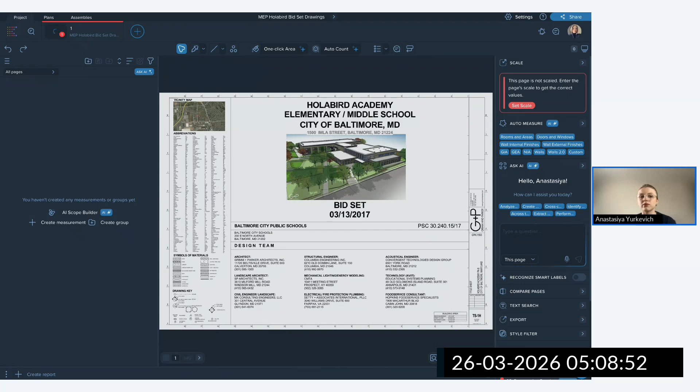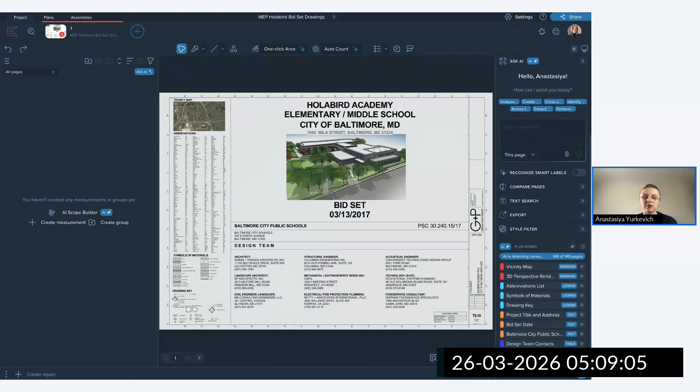So what I see here, just a moment, you can see it detecting those zones. Again, pretty big file, but what it's already doing is processing the pages, and you can see it detects the zones. I'll open a different file so you can see what we have here.

This red zone is labeled as drawing, which is correct, and this will help some other tools understand. For example, text search, and I'll show that text search should count only on the drawing. We don't usually need to count within tables or legends. So it helps text search understand where to count and what to count.

The same goes for some notes and tables. It will make it a little easier for other tools to search for information within tables and schedules, because they have already been detected. So this is how it works.

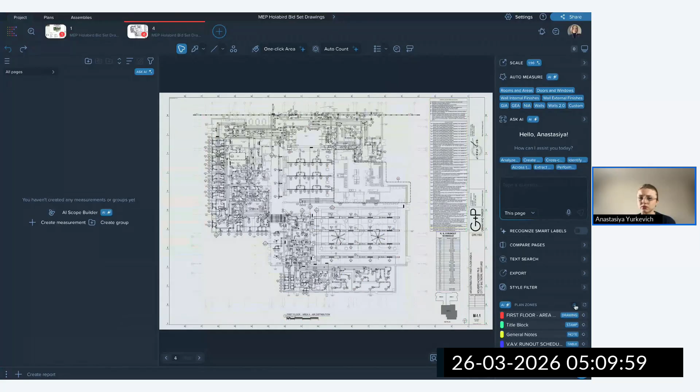Here's the little eye icon. If you don't want to see those zones, you can hide them for a second. If you click one more time, you'll see them back again.

What you can do, first of all, if you open the file manager, you'll be able to rename your pages quickly. We have rename with AI still available — you can ask the AI to rename the pages and then adjust the results. So it's still quite flexible.

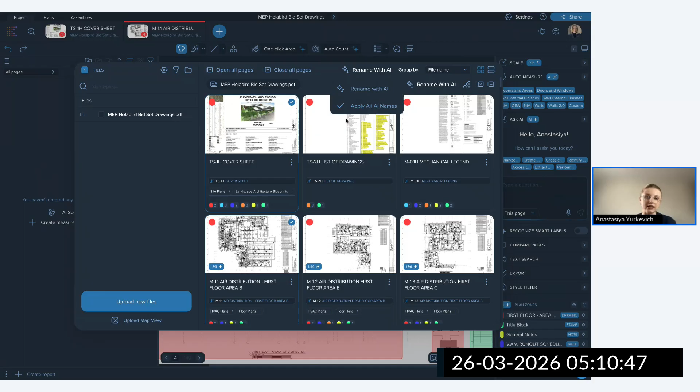But here there's also apply all AI names. What that means is the AI went through all the pages, picked up the names of the pages, and now, in a second, they're all named based on the title of the page. So you can either use rename with AI if you want them a little more custom, or if you just want the page name, use apply all AI names. This is something the feature does automatically.

One more thing — we get this question quite a lot. If you have tables, what's the easiest way to import them into a spreadsheet? Because it's sometimes not possible to select them like PDF text, and rarely does that make much sense.

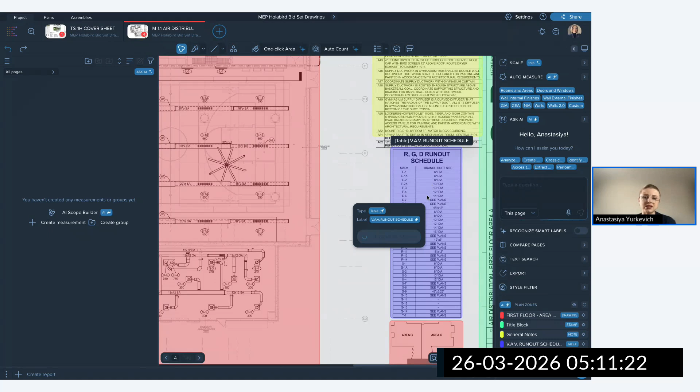Here, right now, if you click on anything like a table or legend, it's going to allow you to export it into sheets. So you just need to click. It's a quite simple and small table, so it's going to be quick. You can see it's generated — you'll see the same exact table, but within your spreadsheet.

Of course, with larger tables, it may take a minute, depending on the size of the table. But you can just click and keep doing something else. It's going to process your request, and eventually it'll add that tab into your sheet, so you can keep working.

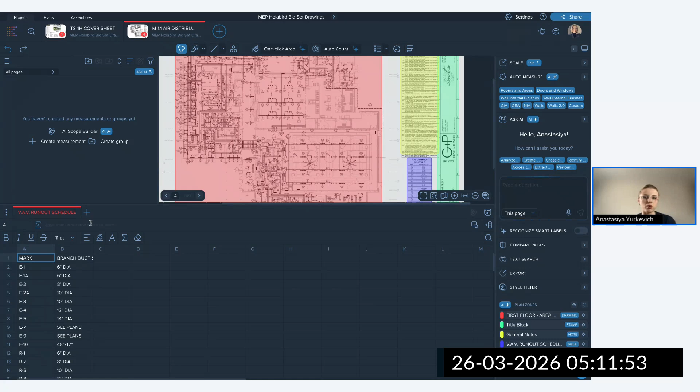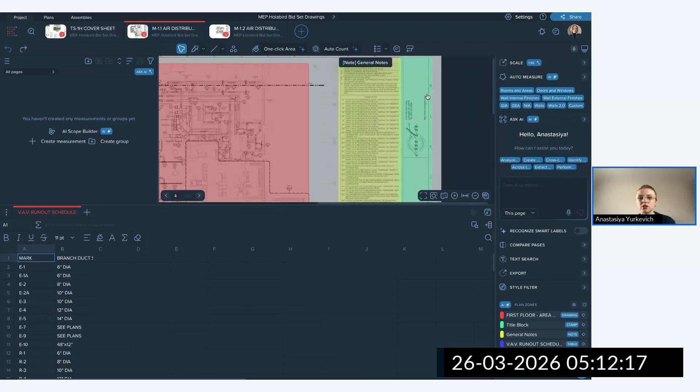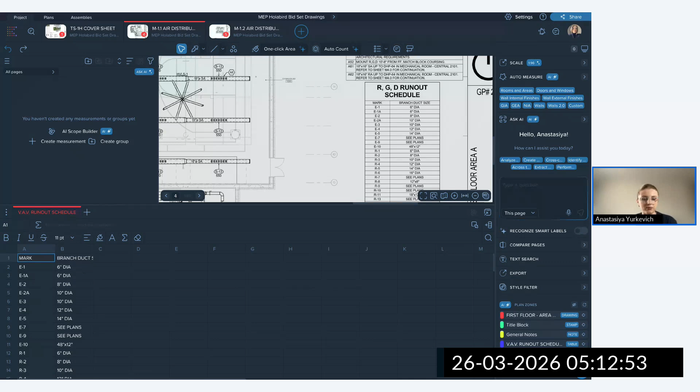You'll be able to move any table or legend into your spreadsheet really quickly by just clicking on it. If you hide it, it's not clickable, so you'll need to click and see it one more time. This is what zoning does - you don't have to do anything, the AI just does it for you automatically. If you'd like to move a table into your spreadsheet, or want your pages renamed, you can just click on it and that's done.

The next feature we have is Ask AI. It's not a new feature, it's an improved one. Ask AI has been with us for quite a while, and we've been improving it constantly. It started with just a single page search, then we allowed a multi-page AI search. Now it's something even a little more smart.

So how it works at the moment - first of all, something I really like, we changed the interface, and right now I can use my voice for any prompt. The prompts to any language model should be very clear, so if you just type in a word or two words, this isn't necessarily a prompt. If it's a long one, it's better to use your voice - just like you can talk to it, you can use any language, just say your prompt, and it's going to find the answer based on your prompt.

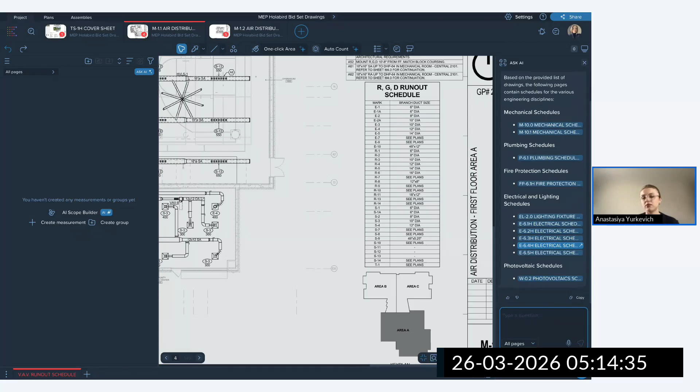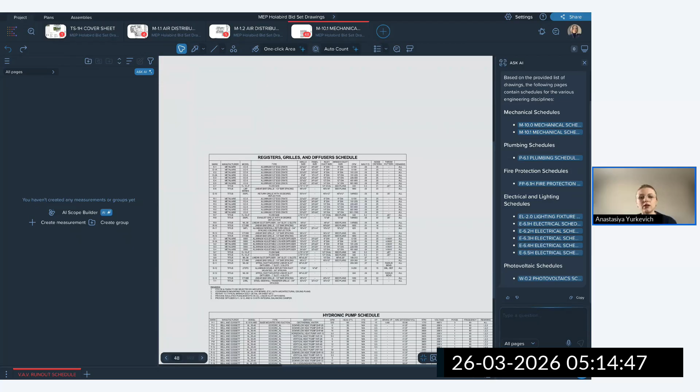So what it can do, for example - let's try, not this page, all pages. Don't forget to select all pages, and then I'll use the microphone. Give me a list of all schedules. And you'll see another great thing about this tool, something we didn't previously have - previously it would just answer with text saying, on page 5 you have a schedule of this, on page 10 you have a schedule of that. Now there are links - it's creating links to the page you need. You can click on it, and now we have a table, mechanical schedule, lighting schedule, and it's going to bring you to the page.

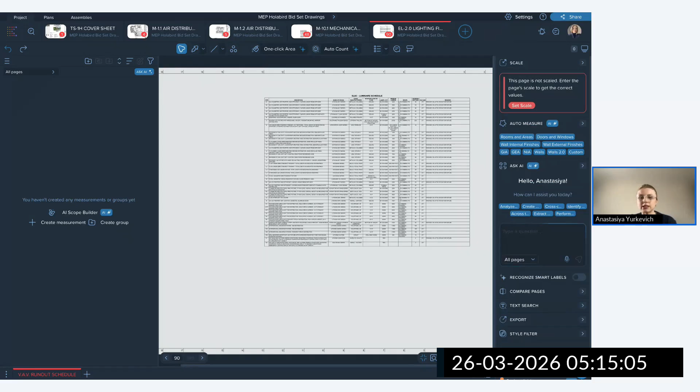Something you can now do - you can switch to this. For example, you want this schedule imported into your spreadsheet. What you can do now is go to zones, click export to sheets. I'll just need to reload the page, I guess, because it's still processing something I clicked on previously. Export to sheets - this will take a moment to be exported into sheets, but I can keep working, I can keep doing something else, and it's going to eventually just be imported into sheets.

So you can quickly find all the relevant information - where is the page with division 8, 10, or anything like that? The page with lighting schedule, the page with, I don't know, plan for - let's try, what pages have HVAC plans? My mistake, all pages. It's not going to find anything. Stop.

What pages have HVAC plans? And I guess it's going to still produce some links, so I can just click, and it's going to bring me to the HVAC plan, which is very useful if you have a lot of pages, and especially if you're working with something, not just all of them - floor plans, then it's going to floor plans, air distribution.

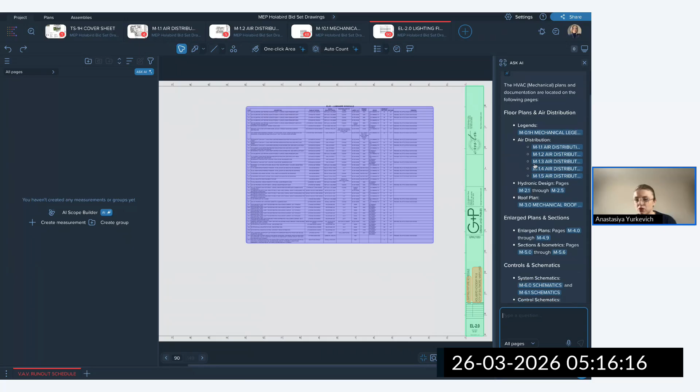So here, if I click on it - yes, HVAC plan, this is correct. So I would need to read through.

Again, my prompt is pretty simple - you can ask it in a little more detail, so with, I don't know, just a drawing, a schedule for something. It's going to respond back with some information.

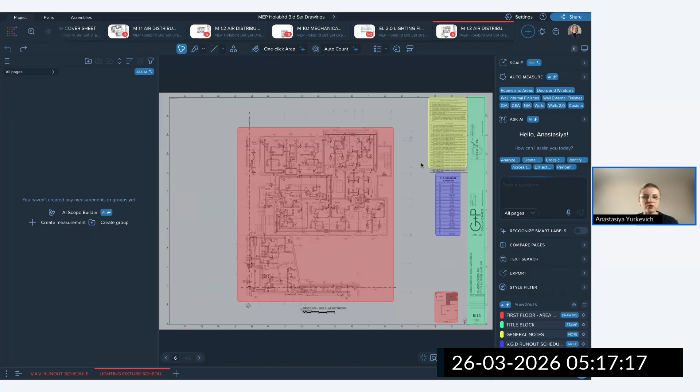And it's going to give you the links. What it's not going to do, it's not going to measure for you. It's not going to provide any deep analysis, find the discrepancies between the plan and the scope - no. It's great for you to quickly work with your PDF file, especially if it's a large one. You can just ask it and it's going to bring you to the page, find some answer, or you can ask it to create a table with something. Yes, but please be aware it's not like an estimator that would do the analysis for you - this is a chatbot. Let's move on to the next tool that we have.

So Ask AI - the next one is called AI Scope Builder. AI Scope Builder allows me to quickly build the breakdown for any new project.

I know a lot of you already have templates and it's easier to just reuse them, but we have a lot of clients with very custom projects, where maybe every time windows will be named and labeled differently, and every time there's going to be some new breakdown. So AI Scope Builder can help with that.

We have some chat built in there, so you can ask it to change something. I'll switch to a different plan that I have - I'll be using this one because it's not like MEP, it's more like a general contractor project. So what I can do here is use the AI Scope Builder.

You can create all the groups manually, it's not a problem. But if you want the breakdown created by AI, you can just run the AI Scope Builder. It's going to take a second, depending on the size of your plan. It works great if you have a spec schedule or other data sources to pull information from, but even if you don't - just a floor plan or a couple of elevations - it's still going to try to create something for you.

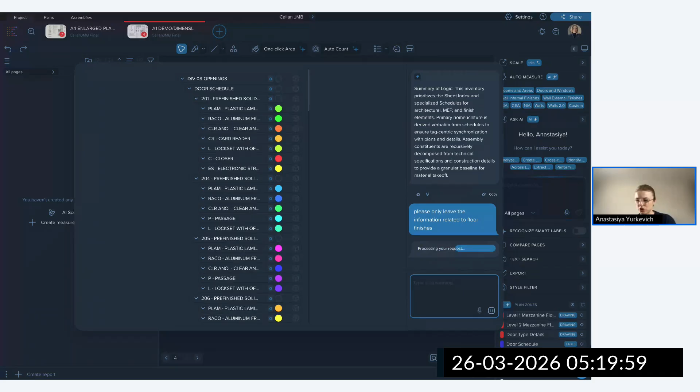Well, it did - you can see division 09 finishes, floor finishes, all the types of finishes, and then the floor preparation. And you can create that breakdown - just click create breakdown. It's created, and now you can start building measurements and adding them into the groups.

Of course, you can still delete groups, add groups, rename them - it's still very much flexible. We just try to save your time on creating dozens, and sometimes even hundreds, of groups for each and every project.

Let's move on to the next tool that we have - the AI Report Assistant. Another AI assistant that I really enjoy, because you can use your voice, and reports - especially for new users - may not be as clear as we'd want them to be. It takes time for a new user to understand where to click. Now you don't really have to understand anything, you can just type in your prompt and get the result.

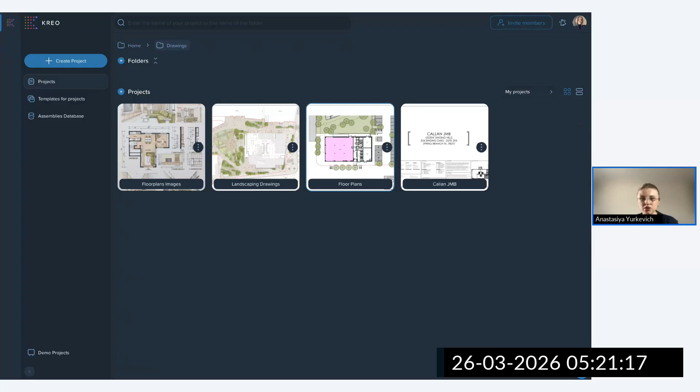I'll switch to my platform - I have a project with a couple of measurements already, so I don't have to waste time creating anything. Here I just have some measurements, show all - a couple of walls, a couple of areas. Now I can create my report. This assistant works with two types of reports: table with measurements data and table with items data. I'll select table with measurements data and click create.

I'll open it, and here we have a little button, Report AI Assistant. We have a couple of prompts here you can use, and again, you can type in your prompt, or I can just say something - let's try: group by all levels and only include area and perimeter columns.

Kreo, I hope it understands that it's 'group' - maybe I mispronounced it a little. Well, yeah, it understood it. You can see what it did - it grouped by level 1, level 2 grouping, basically the breakdown that I have here. I can see internal walls with the same breakdown, area and perimeter - so it only selected the area and perimeter columns.

If you want to add something else - add a column with vertical area - it's just going to add another one with vertical area, so you can adjust the results. I don't think we have any aggregate vertical area, because I don't see the totals. I'm not even sure that we have it - yeah, we have vertical area here.

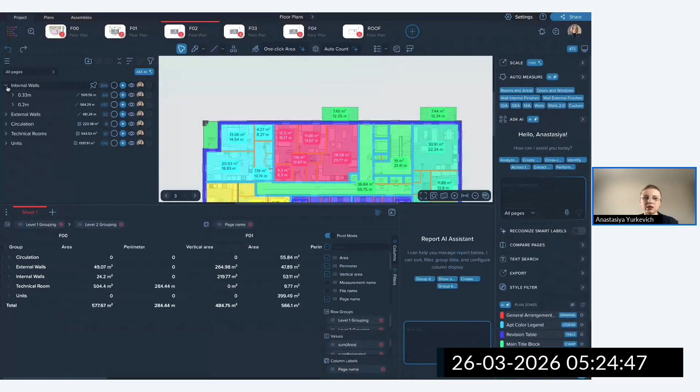Text search, again, we had this tool for a long time previously. It was a simple one, so you can click on any text and it would find all the same text elements on multiple pages. What it couldn't do previously, and again, it's something that this new zoning thing allowed us to do.

Previously, if I click on some element, let's say something S2, any element — I'm showing a different tool, I'm sorry, I got ahead of myself.

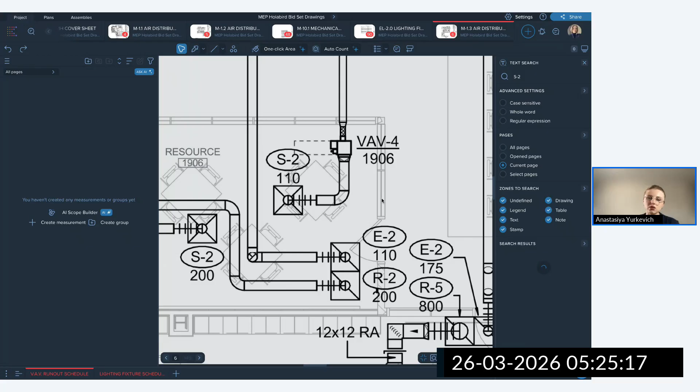Text search here: you can just select the text, click on it, type it in. What it's going to do is find all the same text elements on the current page it's working on. Previously, it would just automatically count everything, from the legend, from the schedule, from the grid, sometimes if there's a grid.

So it was still helpful, but you needed to go and delete some of the elements. Right now, it understands that this one is a drawing and here is a table. So it's not going to just do a joint count — it sees that there are 38 within the drawing and 1 in the table.

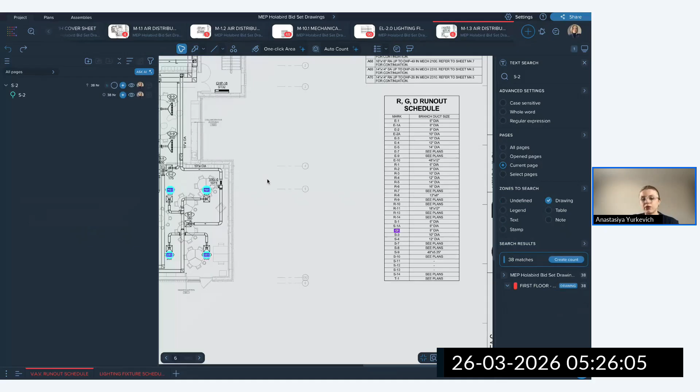And you can unselect — let's say you don't want to count anything from the table, you can just click on the drawing and create a count of 38. So this zoning feature allows us to make the text search much smarter.

And you can, of course, use text search if you just want to find some information. Let me just select another element. I can click on it and select everything, tables and legends and everything, and it allows me to see where it's located.

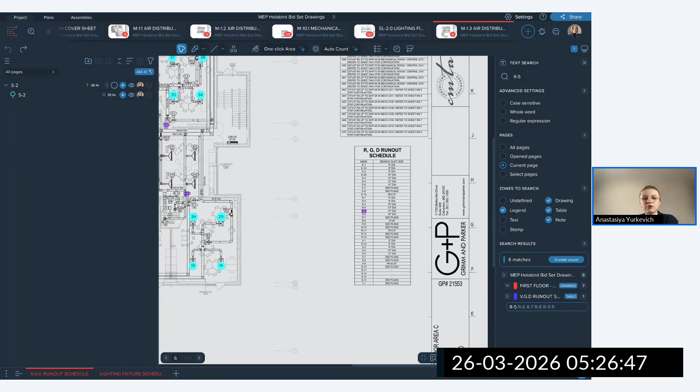Sometimes I can run it on multiple selected pages or just all pages. You can type in any word, for example for your specific trade, and then just click here and it's going to bring you to the page where this table or something is located.

So there are a couple of different ways you can implement this text search. Usually it's to count elements that are labeled with some text, and now it's much smarter. Clients who have been with us for a while know that previously you'd need to go to the legend and delete that 1-2 counts from there. Right now, that should be solved.

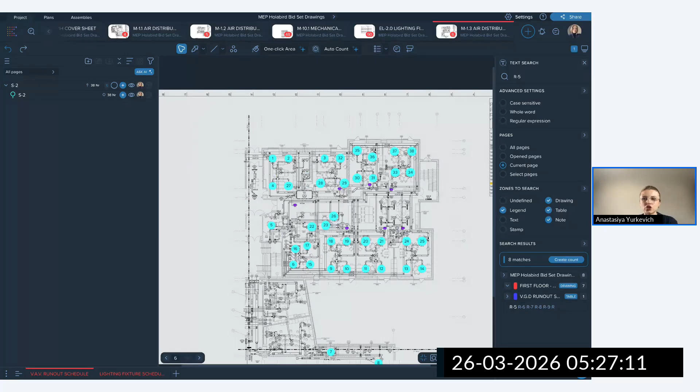So yes, text search is done. Let's continue with a different tool.

Cross-reference — this is the tool I wanted to show when I was showing text search, because for me it's very intuitive. If I can just click on something and get the results, this is what I would go for. So for me, I just always want to click and then see the results. That's why I tried to do that previously.

It's called AI cross-referencing. What it does: MEP contractors, especially HVAC contractors, would know how many different elements you may have on the plan, and sometimes it's difficult to reference them.

Or, for example, finishes, door schedules, floor finishes schedules — a lot of numbers or letters that don't necessarily mean something. You need to go to the legend or schedule, switch back and forth to find the information, and it can take a lot of time — it usually takes a lot of time.

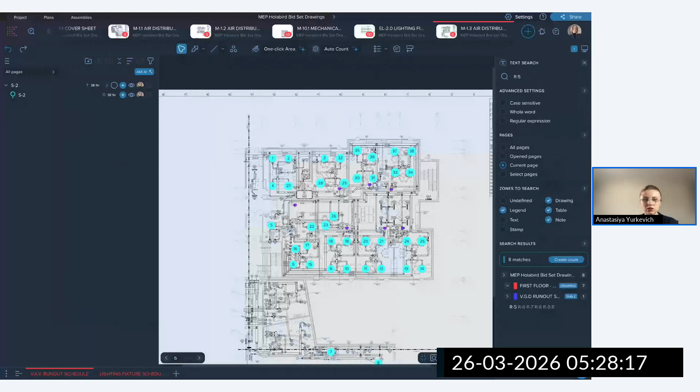Right now, what AI does is let you click on the element. I'll show that — I'll use the same element that I used here.

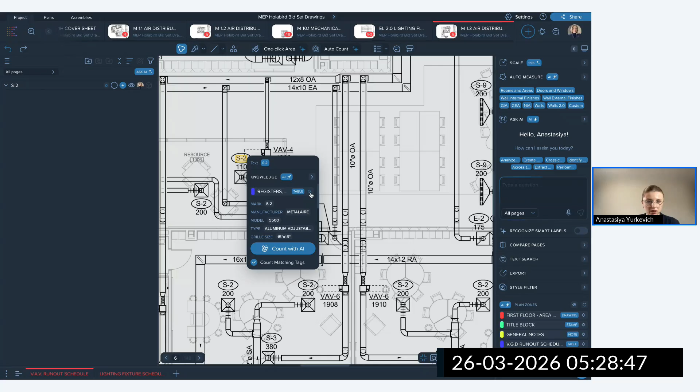I will just clear the text search. Let's do the same S-2 element, so you can just click on it. Again, it's available automatically, you don't have to launch anything, it will be just there. What it's doing right now is searching for some information about this S-2 element. You can see it found a table with it. You can click on this little pointer and it's going to show you the table.

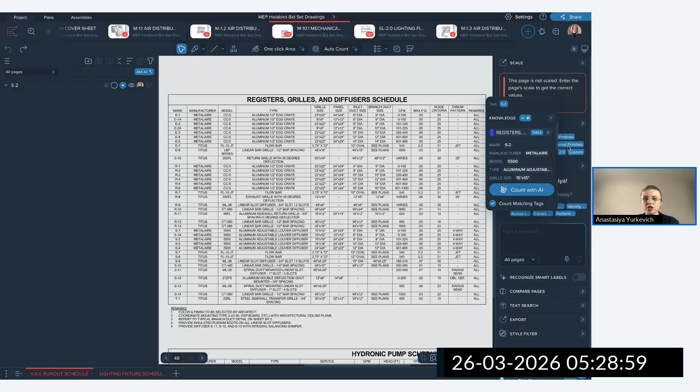So you can quickly see what this element is. Again, very helpful on some complex projects. If you want to go back to it, you can just click on it. You're back on this page, and what you can do is count S-2 with AI. If you unselect count matching tags, and if you want to count everything from this legend, you can click count with AI with count matching tags on.

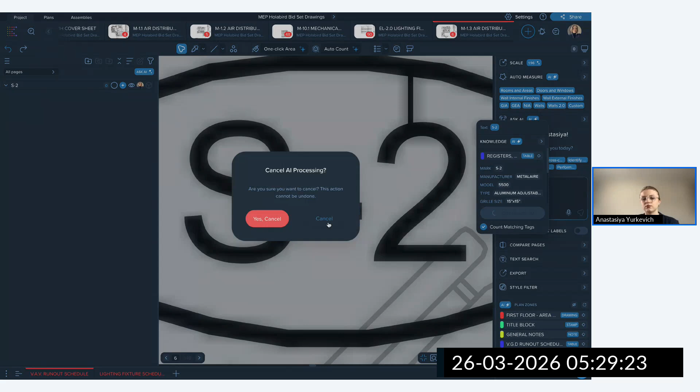What it's going to do, now let's wait. It will take a second because I selected counting from all pages, all the matching tags. Depends on your project, the number of elements and everything. It's going to be a second, but eventually it's going to show you all these elements, all the relevant ones from all pages. I will also show you in a different plan.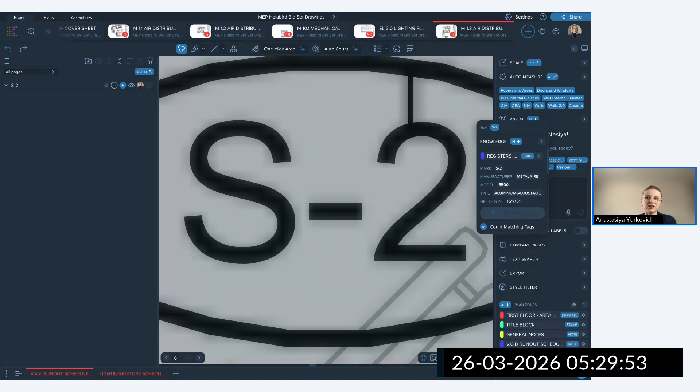Again, this is just an MEP one, really helpful, you can quickly get what you need. And then, again, you can just move the table into your spreadsheet. So all the structure is already there, you just count your elements and move them into your spreadsheet. So this is, I guess, the quickest way. Yes, we will need to wait because it's counting and I cannot make it faster at the moment. Just a moment.

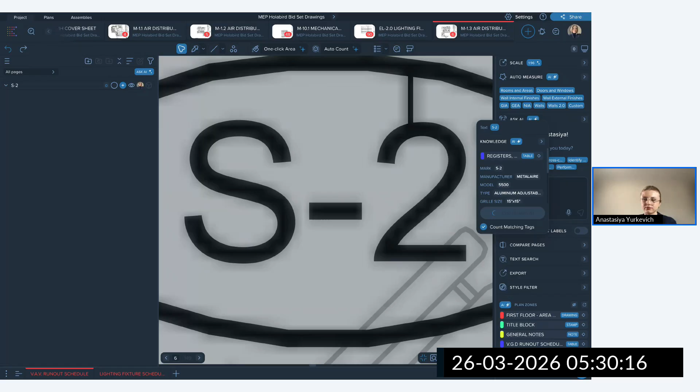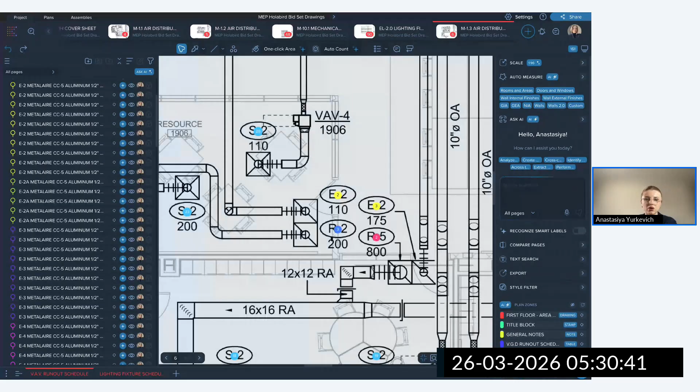I really like to see how this tool works on door and window schedules because they tend to be very complex as well. And yes, you can see what it did. It basically counted these E1s, E2s, E3s from all pages. You can just click and it's going to bring you to the page and you can double check the count, so you can see they're all counted. So the S2s that we counted here, you can see them page by page.

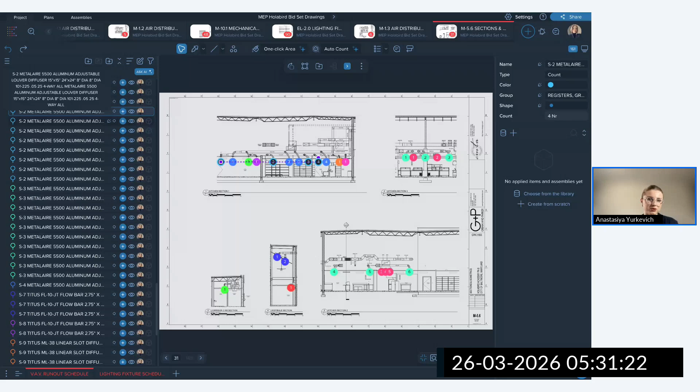Of course, this is something I should have started with: you should validate, so please double check really quickly. Usually it should be correct, but here, for example, I'm not sure if you're going to need this page. It's much easier if you just click on the page to make sure that nothing from some elevations has been counted. I don't think you would need this count here, or from some details or something like that. So please double check, but double checking is always faster than going and clicking and then finding the references and everything.

So just quickly look through the pages, and you can see a lot of elevations in this project, so not sure. Yeah, this is a regular plan, and this tool, again, it understands the zones, so it will not count from the legend, from the schedule. It should not, it's AI. Please double check, if you see a mistake, report to us.

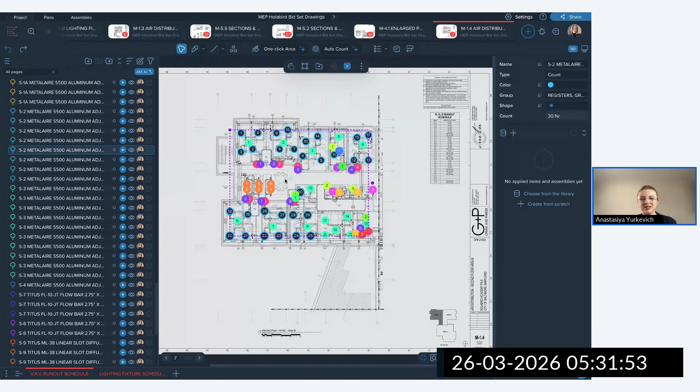AI is good, AI is no magic. It's not perfect, AI can make mistakes, so double checking is on you. The work is now like the initial measurement, it is on the AI.

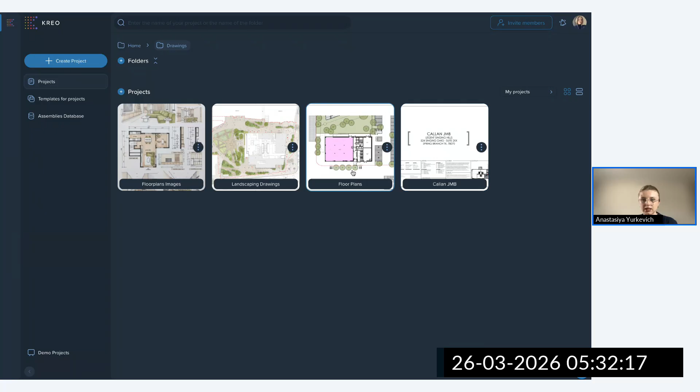Yes, so now I have all of them counted. What I also wanted to show you, because I have a really good example for that, let me just find it really quickly. Forgot where it was. Here. So I had here 212, one is floor finish, another one is door type.

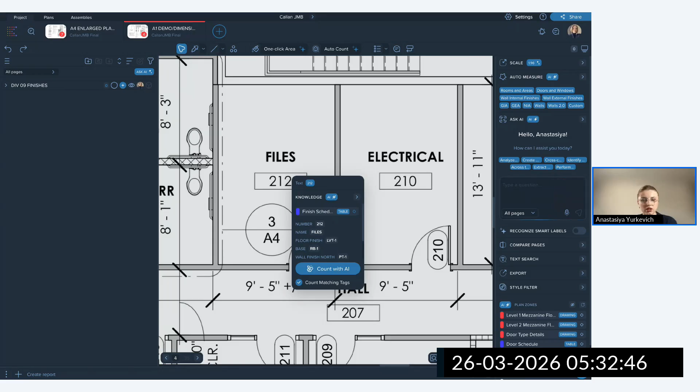So what AI should do, you should understand what a floor finish is and what a door type is. So here you can see finish schedule, so it picked it up from the finish schedule, not from the door schedule, from the finish one. You can click on it and it's going to bring you to the finish plan. Again, click on the text to get back here and you can count with AI.

If I click on this door tag, it should understand that it's a door, not a floor, even though the number is the same. Door schedule.

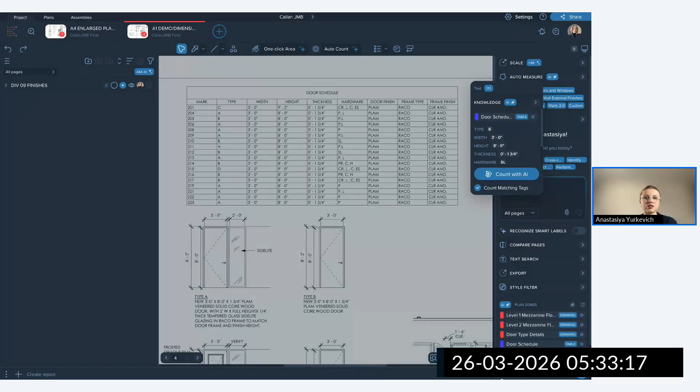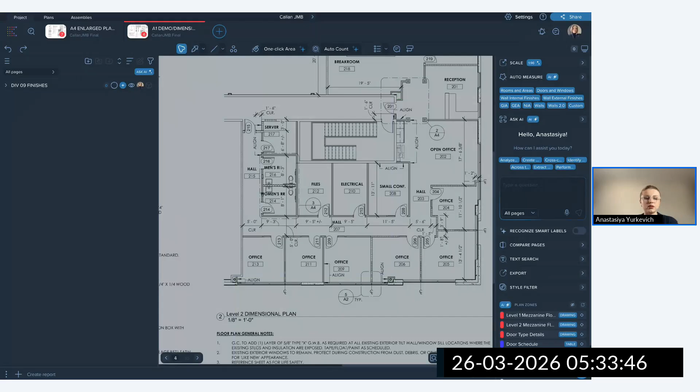One-click area is not a new tool, it's been available for a couple of years now, but right now we made it a little smarter. It can now classify the measurements. I can't identify directly what it's taking into account when classifying, because it seems like it takes everything - the legend, how the area looks, the pattern, everything. I'll show that, starting with a landscaping plan.

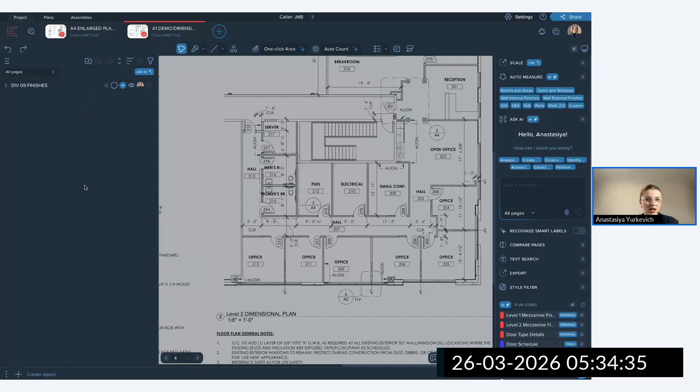Landscaping contractors use one-click area a lot. So what I can do here - this page has no schedule at all, just some keys, but that helps. No schedule, no legend, nothing, no information that one-click area can benefit from. I can just click on it, and it's going to go and measure something.

AI classification here is on. I need to create my measurement and it will try to generate some name - for example, green space. We don't have details to make it more specific because there's no legend, but it understood it's a green space or a landscape zone or something like that. I'll click on something else and it will try to assume what it may be without any details. This is the best it can do, and it does it pretty well - surprisingly accurate even without the legend.

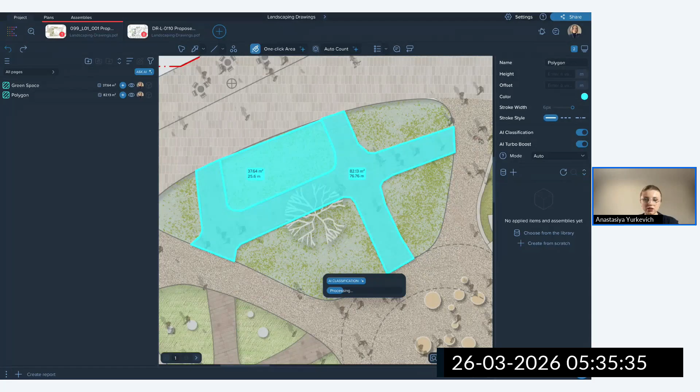Pavement - well, plants and areas not, but it will give you a couple of options. Let's try, yes, external pavement. So it can work without the legend, and it can also work with the legend.

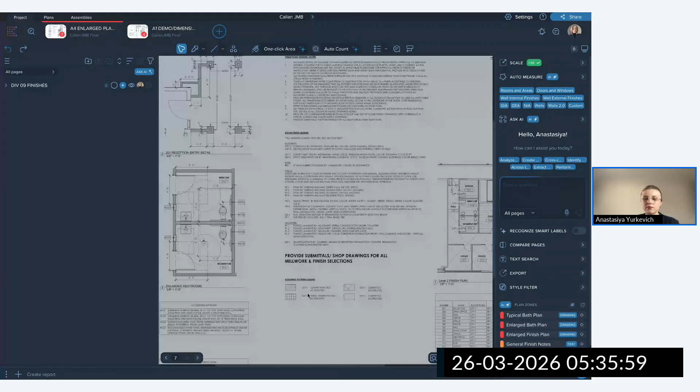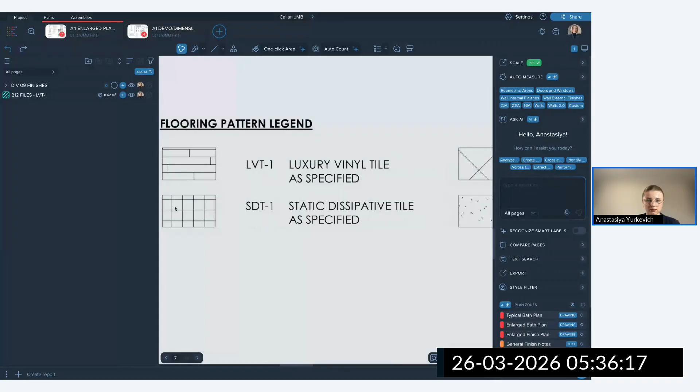Here I have different finishes, a legend with a pattern legend for flooring. Let me use it for one of the flooring types - it's going to measure it, I press enter, and in this case, since there's a legend, it's very specific because it basically looked into the legend to find this exact name, where it is here - you can see luxury vinyl tile.

There's no way to make it more specific. Same with tile - you can click mirror tile and it's going to find and identify what it is. So it works with pictures, with geometry, with legend, without legend, with anything basically - with pictures, even this landscape drawing was a picture.

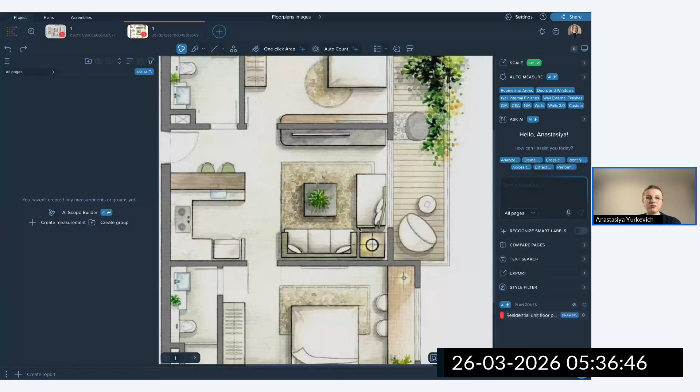So I'll show you something that's just a picture of an apartment, not a construction plan or anything like that. One-click area - let's try a bathroom or a balcony. Create - it will still try, even though there are just a couple of pixels there, it will still try to tell me what it is. Bathroom. So sometimes it even surprises me how smart it is.

But yes, if you have a legend, it's going to be even better. You can turn it off, of course, if you want. Sometimes you can create a group, call it some turf or something, and save everything under the same name, not to wait - this is an option, you can just turn it off. But here, if you'd like to use it this way - balcony or terrace. I'm not sure what it looks like, a terrace, so let it be terrace.

This is what this new one-click area can do.